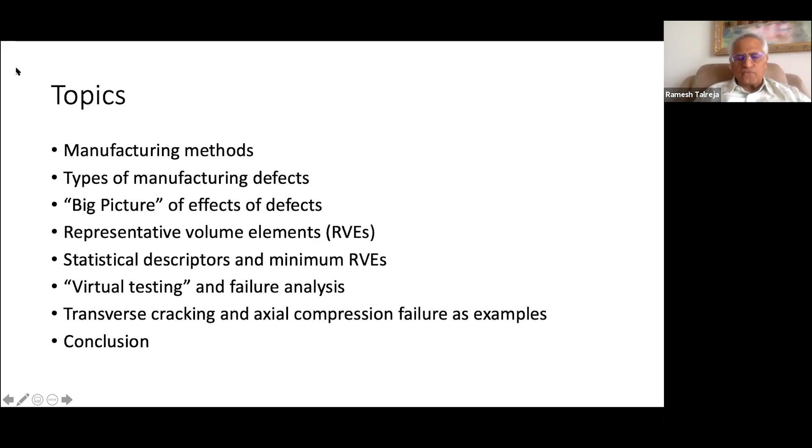I'll illustrate all of this with two simple examples familiar to most people: one is transverse cracking, and the other is failure under axial compression of unidirectional composites. Then I'll conclude. Manufacturing methods are many in polymer matrix composites.

Earlier, from the manufacture of boats, glass fiber boats and such, one was doing hand layup, and in some cases that is still how it's done. There are variations of that—rather than pour the resin, you spray it, or lay up the pre-preg manually in many cases. Automated methods are actually increasing more and more and becoming less expensive.

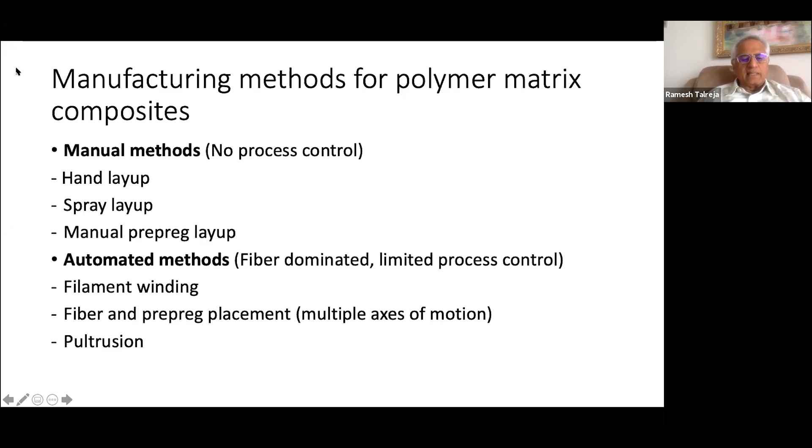In most cases, automated methods are based on the fiber direction—you have to take the fiber orientation as the goal for automated laying up. So filament winding, pre-preg layup, and pultrusion are common examples of that.

Whereas molding methods have developed over the years. RTM is sort of the classical one. Its variations include vacuum-assisted RTM, resin infusion in various ways, and thermoforming. The main point to recognize is that any manufacturing method that is controlled well will give fewer manufacturing defects, and as you control the manufacturing more, typically the cost goes up. It's also to do with whether the particular composite structure allows process control.

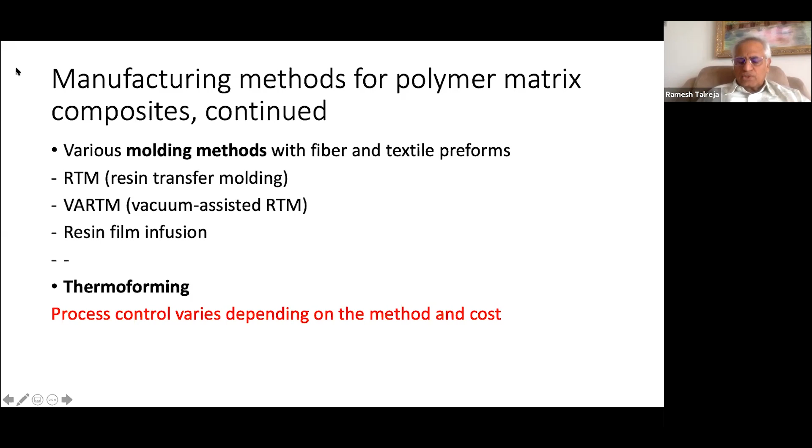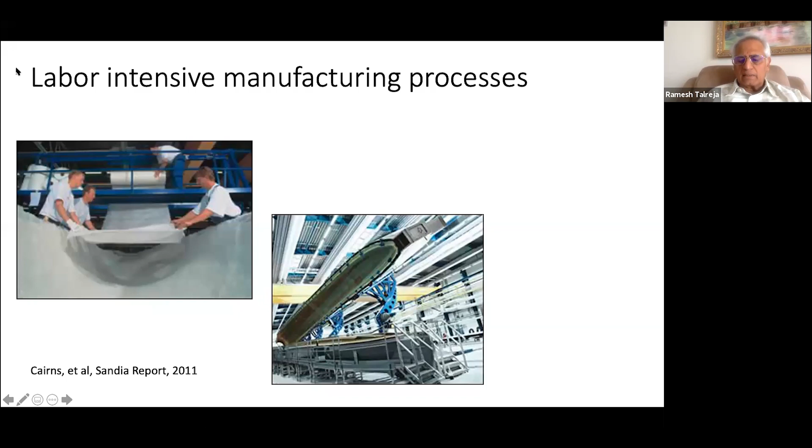So with this, I'll show you some images. This is from the Sandia report of 2011, where they went around and looked at how wind turbine blades were being manufactured, and took pictures to show how things are not as advanced as in the aerospace industry, simply because of cost. The picture on the left is a hand layup of mats in the mold. On the right, you see two parts of the mold being closed. You can imagine that the labor-intensive input here reduces the amount of control you can have in producing a quality product.

Here are some laboratory examples intentionally trying to see how defects will come about. On the top left, you see a case where prepregs were removed too early from the bag in which they were enclosed, so moisture in the air settled on the surface and diffused inside. Then during curing, that moisture expanded into voids you see as dark areas. Here you see a void, typically an air pocket trapped between two layers, and the consequence of that leading to debonding of a fiber from the matrix around it.

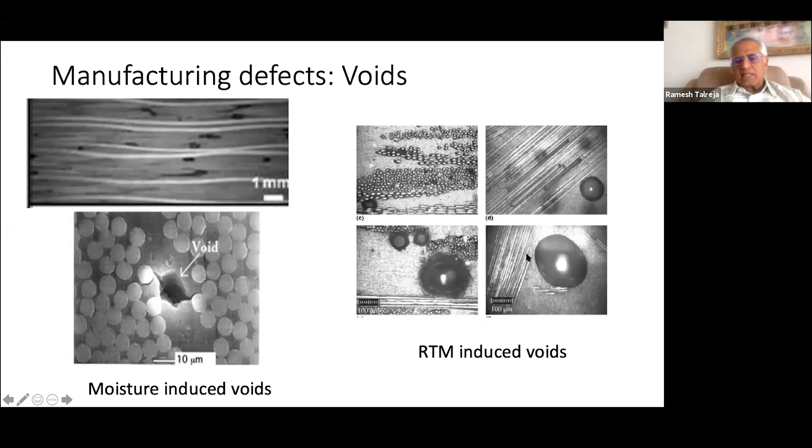Here you see RTM, because it's low cost, typically with much less control. So in some cases you could have a lot of air bubbles left over, and they become essentially undesirable void-like entities that could be causing trouble.

Here's again from the Sandia report, a section of a wind turbine blade where you can see thick layers stacked on top of each other that, on curing, shrunk and caused a disbond between the layers, and therefore delamination under service conditions. Here you see something done in a laboratory environment but following the manufacturing process as it's done in practice, with non-crimp fabric layers stacked on top of each other. After curing, you see waviness and probably some delamination as well.

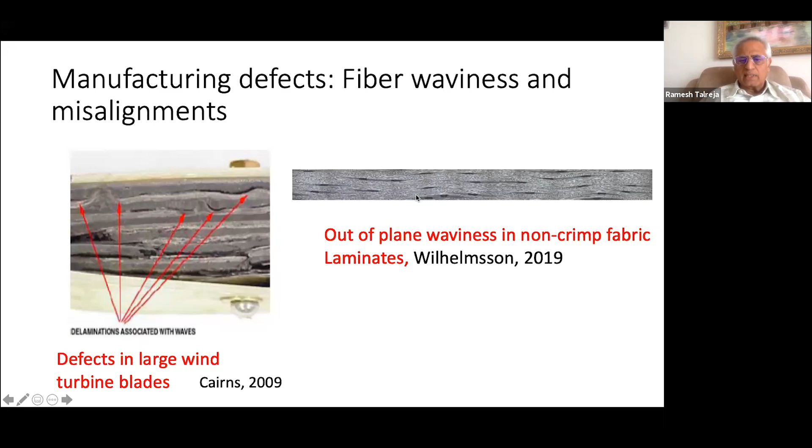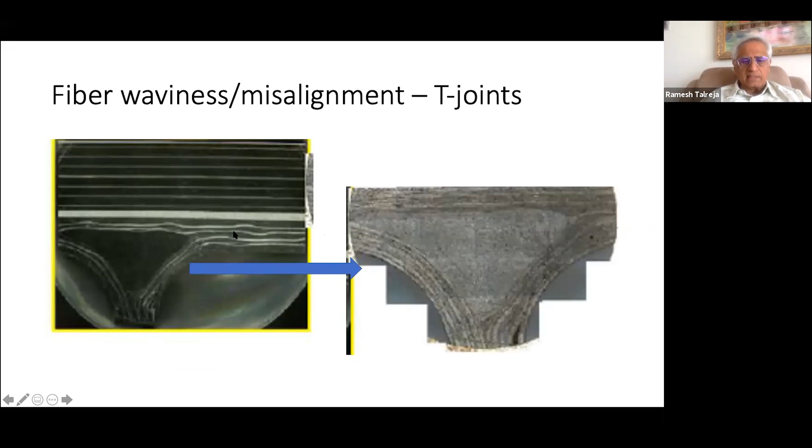I'll come to this particular example a bit later. Adhesive joints are common in composites, and often the thermal expansion mismatch between parts being joined together can lead to waviness of fibers close to the interfaces. You see that situation here, and the close-up picture also shows this.

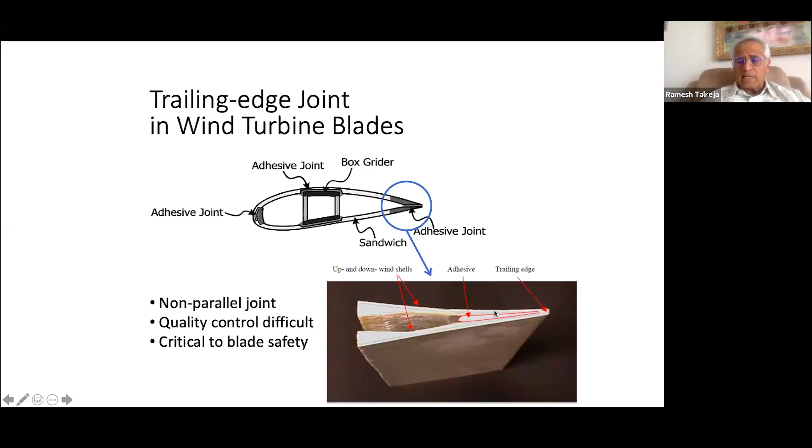There's a lot of adhesive joining going on, and control of this particular joint is very difficult to do, because what's done is to put a paste-like adhesive between the two parts of the shell. And when you close the shell, the two parts, the adhesive squeezes and takes an irregular shape.

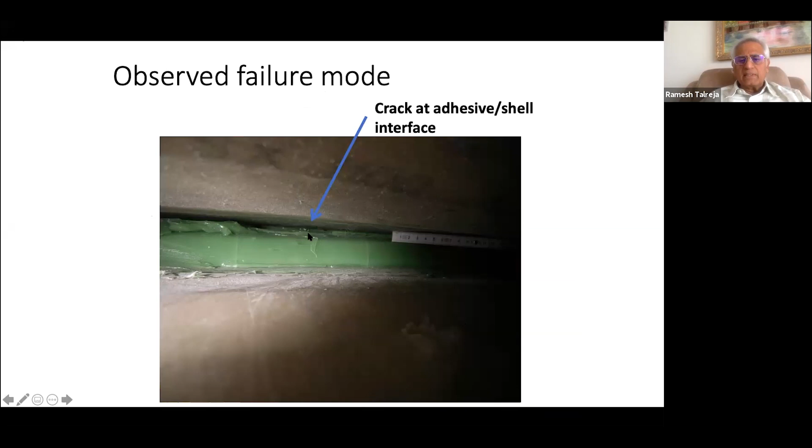You see the result of that is that between the outer shell and the adhesive that joins the lower shell is quite irregular. There are clumps, missing adhesive, and so on. So defects are part of real life in composite materials for the most part. In very few exceptional cases where cost is not of much concern can you control the process completely and avoid defects.

So in this manufacturing sensitive design that I would describe to you, there are three essential steps. The first is to represent the internal structure of a composite when it has been produced, having manufacturing defects. And because the nature of the defects is not deterministic, you had to do statistical simulation of that.

Now, the novel part of the approach that I have been taking with my students is that we want to quantify those defects. So with the statistical simulation, we have added an aspect that will come up with the defect severity as a measure of the defect. And then our idea is to connect that defect severity in step 3 to performance measures.

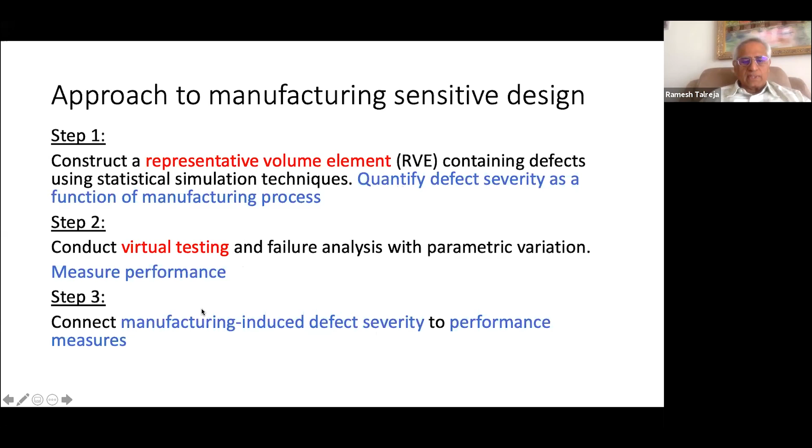And in step 2, you'll do the virtual testing according to what you're looking for, fatigue, static loading, what have you. So this 3-step process is sort of the main thrust of the design strategy.

Here's the workflow of what we would like to see in the future. I mentioned earlier the trade-off between cost and performance, which is right here. So in order to do that, we need to have manufacturing quantified.

My colleagues on the other side in fluid mechanics are working very hard on this aspect. People like me in solid mechanics don't bother too much with that. We wait until they have finished doing their modeling.

And the situation today is that modeling does not provide a full picture of what the microstructure or internal structure of the composite will be, given processing parameters. Anyway, so this is left for the future.

What I'm doing, and similar work in the literature in failure analysis, is to take that manufactured composite, characterize its internal material state, and I have called that RIMS, which is real initial material state.

And as loading progresses, the initial goes to current, so the material state evolves. And that evolution depends on the defect structure in the microstructure. So there's a stationary part of the RIMS that does not evolve, obviously, such as fibers and matrix, but defects become cracks and they evolve and they affect the performance.

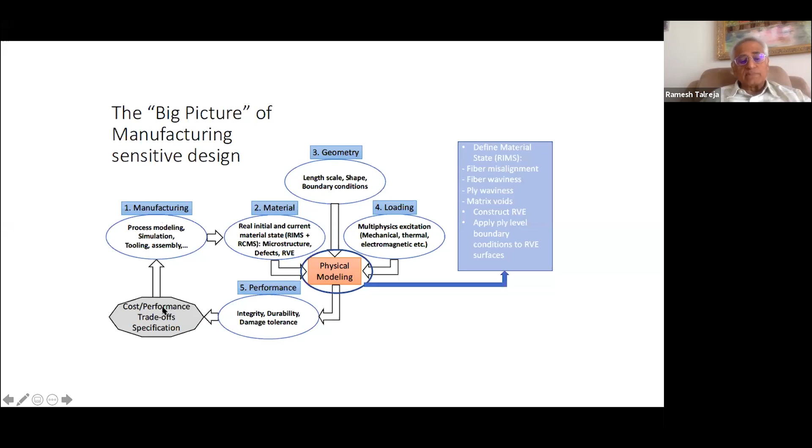So that enters in a physical modeling exercise where other information of geometry, boundary conditions, loading comes as well. All that leaves out as an output performance measures. And that could be for structural integrity, durability, damage tolerance, and taking those quantified measures and then the manufacturing process parameters, one would be able to, sometime in the future hopefully, do this cost-performance trade-off.

So that's the idea. So I'll do two examples, as I said earlier, that are very familiar, to illustrate the basic concepts, the approach, and so on.

One example is that of transverse cracking, which actually should I say, in design, is the target, because that's the first mechanism in most cases that occurs. And you would want to, in many cases, just be sure that it does not happen. So transverse cracking has been a lot of focus of a lot of studies.

These images here show you that when you look at any instant in a cross-section of a UD composite, you see a fiber debonded from matrix, you see a crack in the matrix, and it may be that the debonding occurred first and proceeded as a matrix crack and joined the next debond, or that in a resin-rich pocket, a crack formed in the matrix, went to the fiber surface, debonded it, and proceeded that way. So those are the issues one can resolve through failure analysis.

Here's another example which I showed earlier, where defect is playing a major role. So voids is one type of defect, and non-uniform distribution of fibers, that is to say clustered fibers and resin-rich pockets, those are sort of the features of the internal structure that in this case are important.

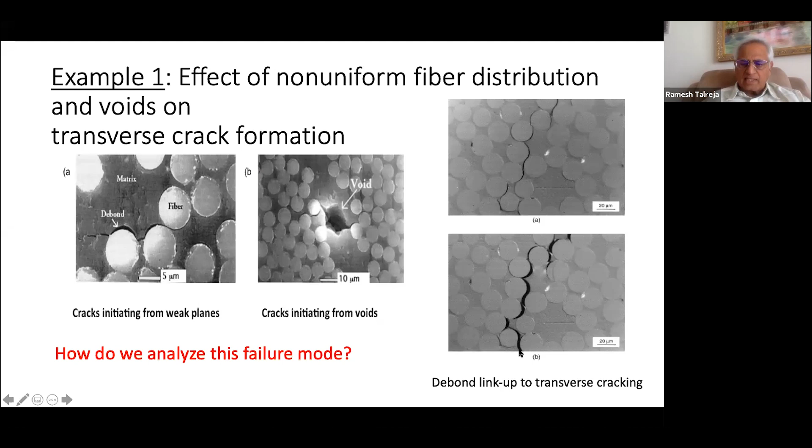Here are certain images that show this early stage develops into a full crack, and the evidence of that comes when you increase the loading, in this case horizontal.

You see the thickening of that dark area, which suggests that on one side, the composite is separating from the other — a crack has formed here. This is a failure mode we like to analyze. So step one of the three-step process is to construct the RVE. As I said earlier, this is not the RVE that is taught in university courses. The original idea of the RVE, which came from work by Hill primarily, was to see how for a heterogeneous body you can do averages of the internal heterogeneous structure.

That is a very benign type of RVE, relatively easy to construct. But if you want to do failure analysis, where the internal structure should be representative of what manufacturing produced, the RVE has to account for certain features of the internal structure important to producing the damage. Those defects I talked about — non-uniform distribution of fibers leading to clusters, resin-rich pockets — had to be in the RVE from the perspective of causing failure. So I'll illustrate how that is done.

The manufacturing defects, as I said before, had to be put into the RVE in a statistical way. So the RVE has to be generated through some statistical procedures, which I will describe soon.

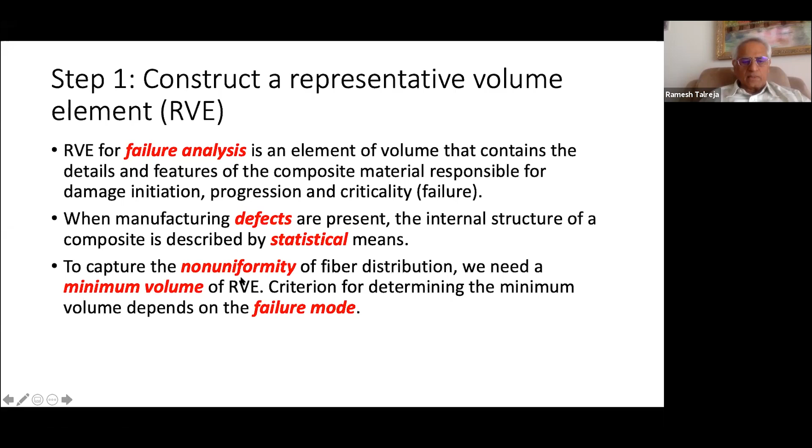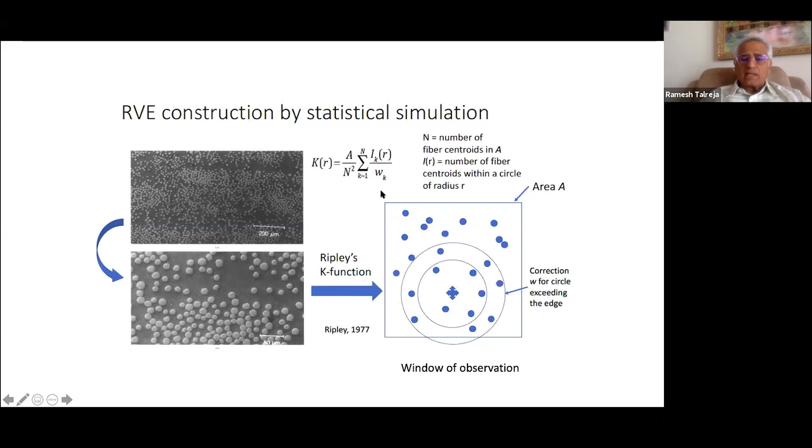It has turned out that some work Ripley did back in 1977 is very useful here. He produced a so-called K function, because he called it K. The formula is here, and I'll talk about that in the next slide. Essentially, what is to be done is to take a representative area A, a field of view, in which you go to the non-uniform distribution of fibers and construct this K function. Let me show what that is.

Here's that picture again. You go to any arbitrary fiber, draw circles of radius r, and plot that radius r value here, and the K function does a statistic of the neighborhood of that particular fiber — where are the other fibers related to this one. What that does is produce a K-R curve that is characteristic of a certain pattern.

It's like a pattern recognition idea. If I give you one non-uniform distribution of fibers and another that is non-uniform, these K curves will show differences between those. If it's a uniform distribution, the K will have a very different appearance.

That's not enough for quantification, so a G function has been proposed. What that does is derive the variation — how the interfiber distance is changing. When you plot that against R, for small values of R, close to the fiber, you have a lot of undulations.

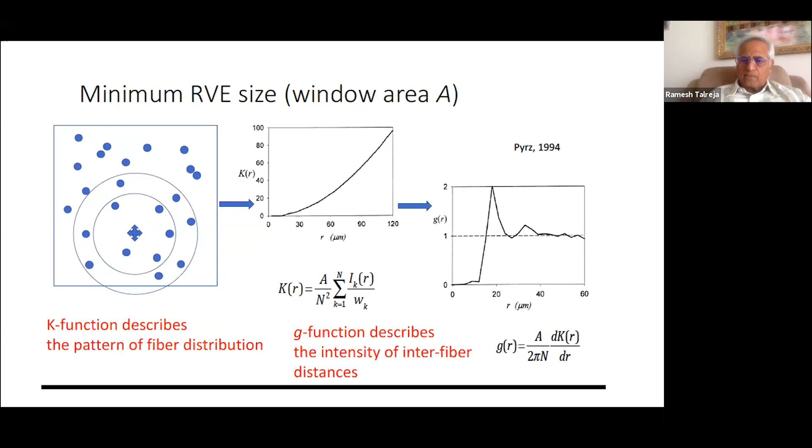As you go further, it stabilizes. What that says is that if you do this statistic up to a certain point, like 40 or 45 microns, you have captured the irregularities. If you go beyond that, you're adding information that isn't really useful, and you want a minimum size so that in computation you don't waste too much time doing analysis.

So how do we go about quantifying this now? That's where our novelty comes in. We have taken two different paths, and I'll describe both to you. I'm calling them RVE construction type 1 and type 2.

In type 1, which is more common in the literature, you start out with a square window in which you place fibers in a uniform pattern with constant separation x between surfaces, as shown there. And then you shake it — it's called the shaking method.

When you say shake it, you have to provide a certain algorithm for shaking, and that algorithm lets you embed your quantification. Now, what's been done in the literature is to just shake it so it becomes non-uniform, but not worry about the degree of non-uniformity. That's where we've made our contribution.

What we do is look at the maximum distance a fiber can travel when you shake it. If you allow it to move that maximum distance and create new positions through random generation of numbers, the final product has maximum non-uniformity. So we call it 100%.

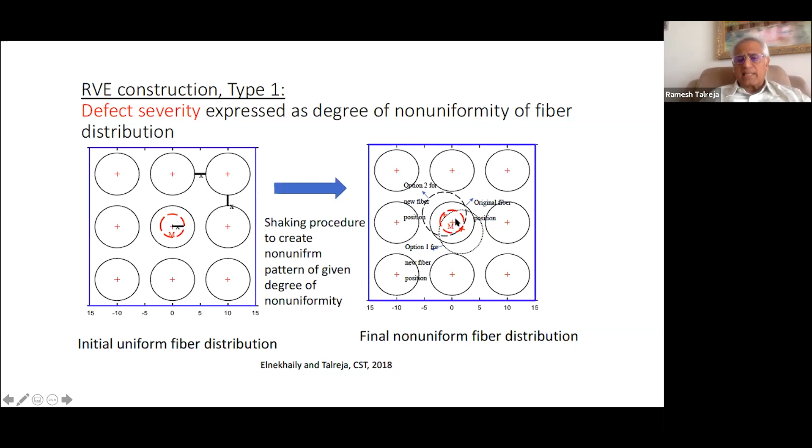Then we reduce the size of the circle in which the centroid of the fiber can take different random positions, and proportionately we say it's not 100%, but 50% or 30%.

Let me show you examples. Of course, it depends on the fiber volume fraction—that's the initial distribution you start out with.

Let's say you start with 40% fiber volume fraction. With 100% non-uniformity, you get a pattern like this. As you reduce the non-uniformity, it becomes more and more uniform. Obviously, at zero non-uniformity, you recover the uniform distribution.

If there's more space between fibers, say 30% fiber volume fraction, you have a much more irregular pattern at 100% non-uniformity, and so on.

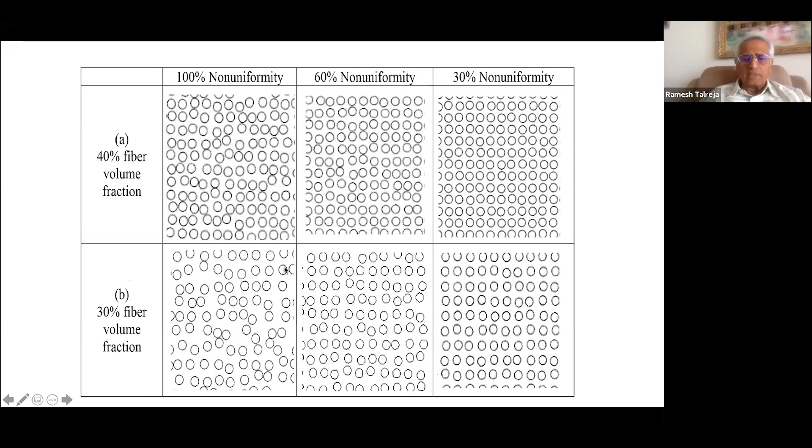The other type is where I want to see what happens to fibers that are initially in, say, a fiber bundle in a fixed position, and as you infuse the resin, how they create a final pattern with non-uniformity. So here we go to the central fiber, make reference there, and then go radially out considering all the rings around it.

You're looking at the first ring here around it, using polar coordinates r and theta, and give the fibers mobility in the radial direction as well as the theta direction. Those two variables together provide the mobility given to this bundle.

If you give increasing mobility, it will spread out more and have fewer clusters. So the algorithm, described in the paper, spreads out the fibers from the outer regions as you proceed.

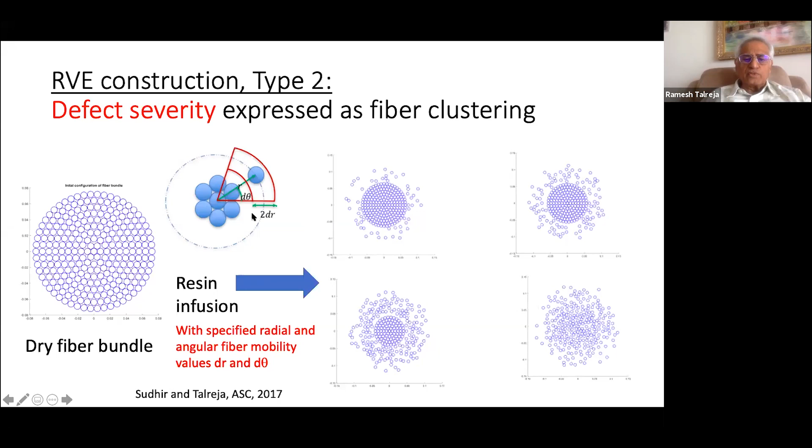You keep doing that until the distance from the central fiber to its neighbor reaches a certain minimum prescribed distance, because you want some resin there to put finite elements in—minimum two. So this is the pattern generated when you specify those mobility quantities, dr and d theta.

Here's an example of low fiber mobility, and you see it's very clustered. With high fiber mobility, it's less clustered and begins to have resin-rich pockets. So that's the idea.

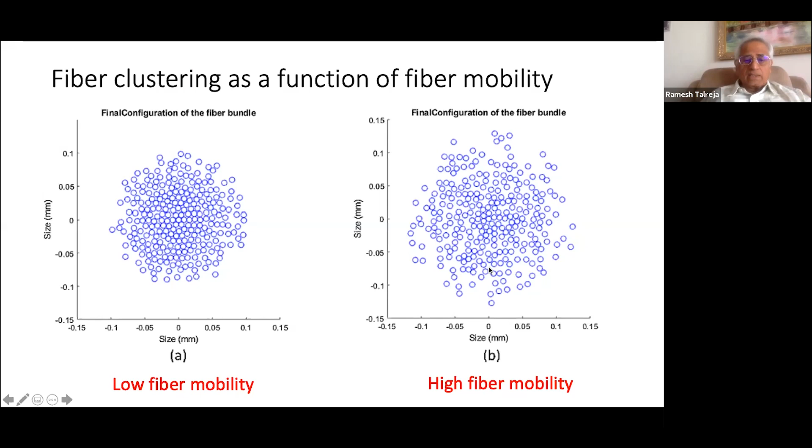Now, getting the minimum RVE is the next step before you do failure analysis. The idea, as I described earlier, is to get a certain statistic to calm down so that if you increase the size of the window, it doesn't add any further useful information.

In this particular shaking method, there's a statistic—I don't have time to describe it, but the concept is clear: that statistic varies until you reach a certain point beyond which it's not changing. So 200 fibers in the window would be the minimum size you need to use, and that's the size of the window.

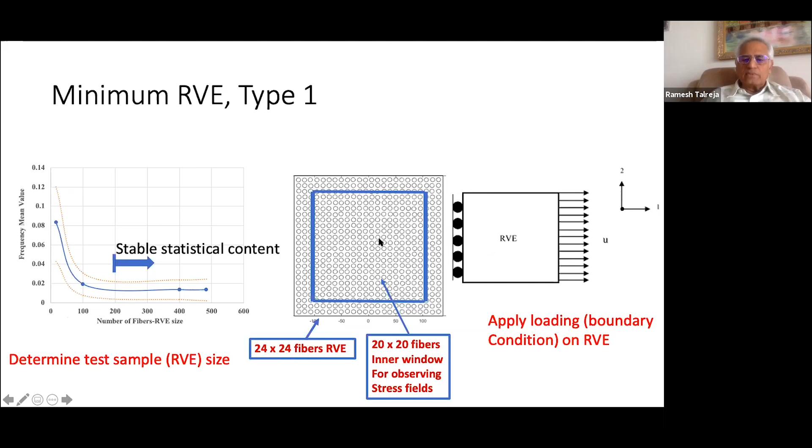You put additional fibers around it to protect that window from edge effects. You apply uniform displacement to this RVE. The edge effects will be in this region, so you go away from it and do your failure analysis here.

The other type is where the final pattern isn't rectangular. So what's done is to encircle it with a circle and then embed that—that's called a cell. Embed the cell in an outer region.

Why? Because this isn't totally suited for applying boundary conditions. So it's done, not so commonly, but the idea is out there: you do an embedded cell, where the outer region is a homogenized composite with straight boundaries—in this case, a square region.

And then we use the Hill idea: if I apply uniform displacement to the boundary and get uniform traction resulting from it, then I'm fine.

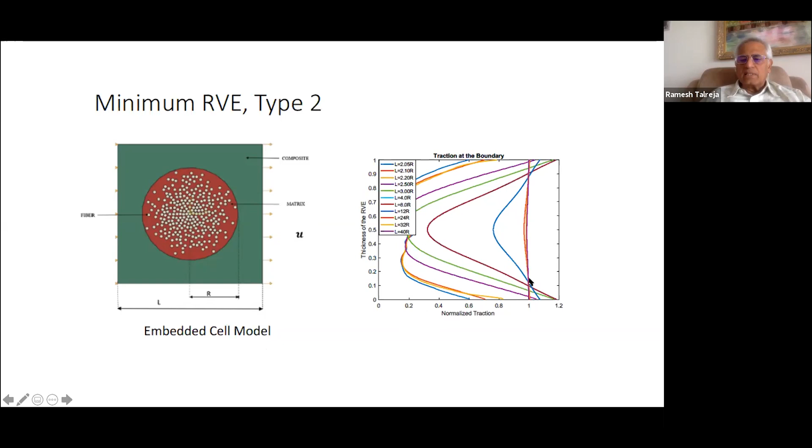If I reduce the size of this outer region, this reduced size gives a non-uniform result. That is, if I apply uniform displacement, I get non-uniform traction. I keep increasing the size until I get equality of uniformity in both cases. Those are details you can find in papers if you wish.

Now for the failure analysis, I need to spend a minute explaining my philosophy. Failure analysis is a legacy of what we've been doing for metals, where uniform conditions often exist. That's not the case here. Using stress analysis causes difficulty in my mind because stress is a tensor and you cannot separate it easily. Let me explain that.

So here's a non-uniform pattern. I'm applying remote stress sigma. If I go to a point like this, the polar point or close to it, where the axis of loading intersects the fiber, I typically have a dilatational or close to dilatational stress state. That means all three principal stresses are tensile and equal or nearly equal - you have only volume expansion here. If you go to a point like this, you get a mixed stress state, which is distortional. It has both shape change and volume change.

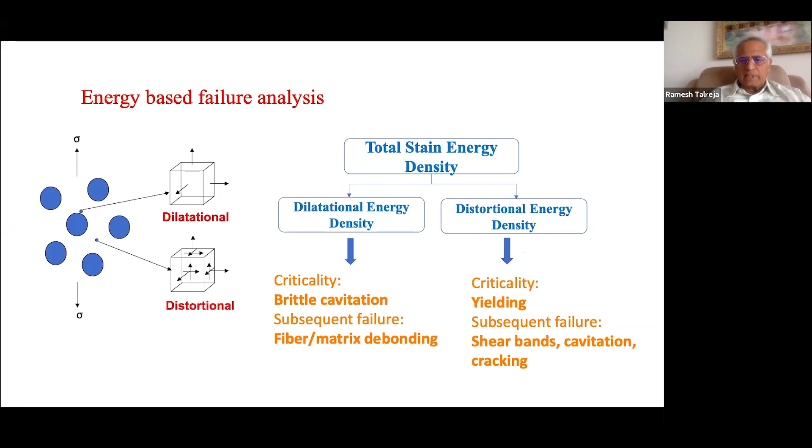With energy, you can separate those two quite easily because energy is a scalar quantity. If I look at the total strain energy, it's split into a dilatational part and a distortional part. The dilatational part becomes critical when the volume expansion reaches a certain value - the material cannot bear further expansion and it bursts as a cavity, or forms a cavity that bursts open. We discovered this mechanism back in 1996; I'll talk about that in the next slide. Most people only look at the distortion energy situation and describe it with the von Mises stress criterion. I'm a firm believer that this strategy leads to problems of a fundamental nature.

Back to this particular point - here's what happens: the cavity forms here. We devised, back in 1996, a method called the poker chip method, taken from some research in rubber by Gent. The important point is that there's a method to independently assess and find the critical value of dilatational energy density that will cause this cavity. This cavity is surrounded by a brittle region because there's no shear, and therefore it expands - bursts open, so to speak.

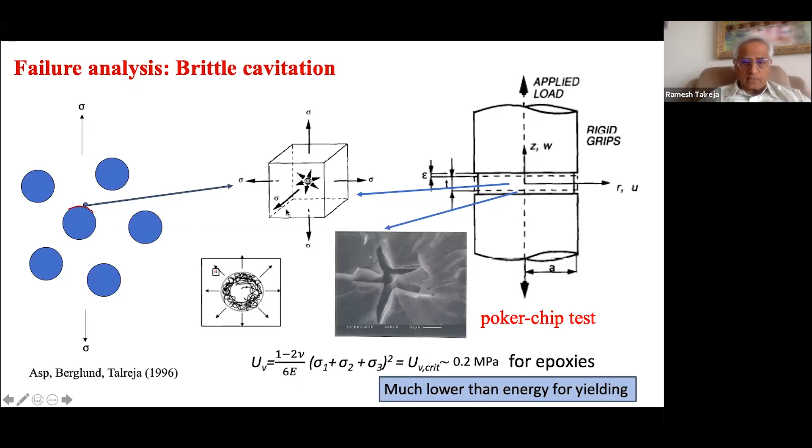The dilatation energy density formula is here, and the value comes out to be very small for epoxy, 0.2 megapascal. This means no other mechanism is able to compete with this particular mechanism. It's an energy dissipating failure mechanism, and no other crack formation mechanism comes close to it. So this is the first mechanism, if its conditions are right - that is, having dilatation energy density.

This will take time to describe, so I'll refer you to the paper. Essentially, what we do is look for the right conditions where the three principal stresses are equal. We plot the ratios, and at an applied strain of approximately 0.3%, the three principal stresses become nearly equal. Then we look at how the maximum dilatation energy and distortion energy values change with applied strain. We find that before reaching this point, you've already satisfied the minimum criterion - the minimum energy density criterion for dilatation. That's what happens in transverse crack formation.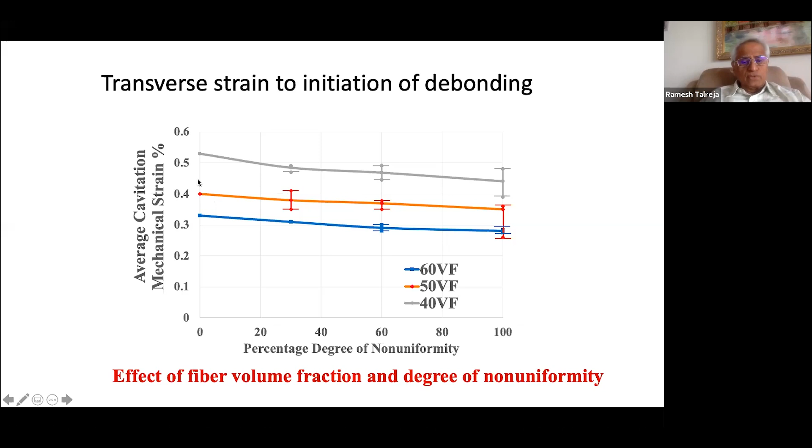So if you're a design engineer and you want to assess that your product has much less control and therefore higher level of non-uniformity, you will go to this value. If you think it is very well controlled with uniform distribution of fibers, then you go to this value.

This is a result which is also of interest. It's approximate because it should have been 3D, but it's 2D. Anyway, I think it qualitatively explains a certain feature that is not intuitively obvious. If I use glass fibers in epoxy versus carbon fibers in epoxy, for the same clusters of fibers, the initiation of dilatation-induced cavitation is earlier in carbon because of the high stiffness mismatch. Now, carbon fiber is believed to be good in every sense, but that is really not the case here. So that's something also to point out.

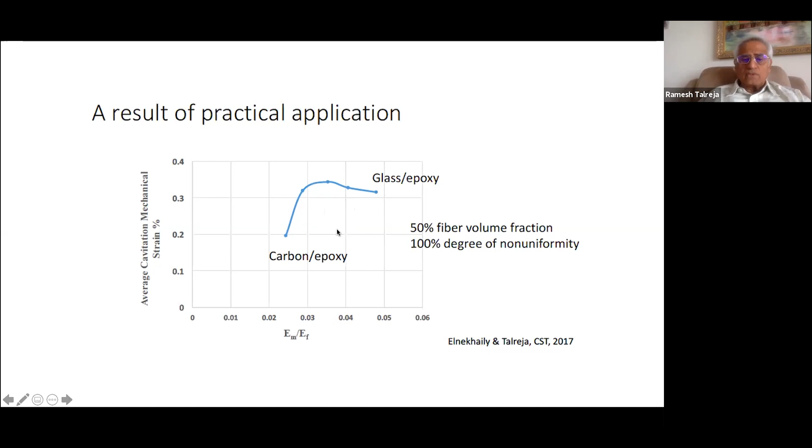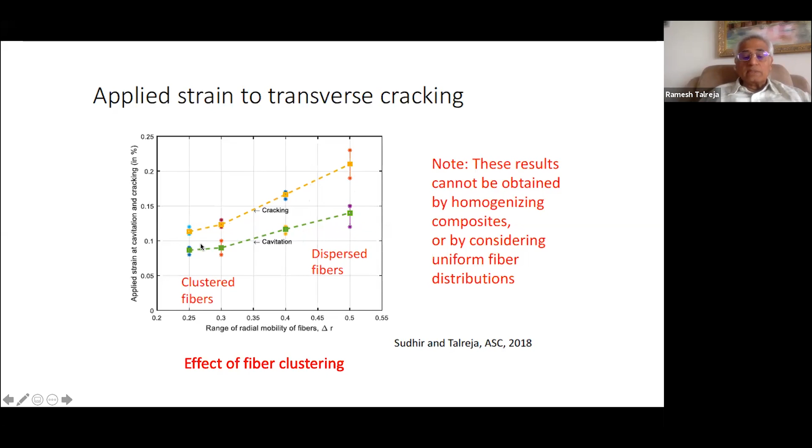We also did analysis of what happens to crack formation from the cavitation point. Of course, it requires higher strain. So this is the initiation, and that's the progression to crack formation. You can see that with dispersed fibers, a higher value is needed to cause cracking, while clustered fibers would do that earlier. So hopefully these are good design guidelines for people concerned with manufacturing.

Okay, I'm going to shift gear and go to another example, which is very different, but illustrates the concepts of this particular strategy. So we are looking at a unidirectional composite under axial compression. At some point, what happens is that you form a kink band. This is now a classical result. Everybody knows about it. This is what happens.

At some point, the fibers break along a certain direction, or along a plane, and another set of fibers fail in a parallel plane. So between those two is what you say a kink band has formed, because it's a kink here. And between those two planes, the fibers then undergo rotation.

So in the Budiansky model, which is classical for this, the geometry constructed has parameters of initial fiber misalignment phi, the rotation of the fibers within the kink band, phi sub s, and this is the bandwidth, and beta is the tilting angle of the kink band.

Okay, using all that with a refined analysis, Budiansky produced this relationship that says what is the stress that you apply at which you have rotation of the fibers. So it's an academic result, very exciting and all that. But you ask yourself, if you are designing and you don't have a kink band to look at, you don't want to have a kink band, how do you get this sort of information in your design? So you had to do some estimates.

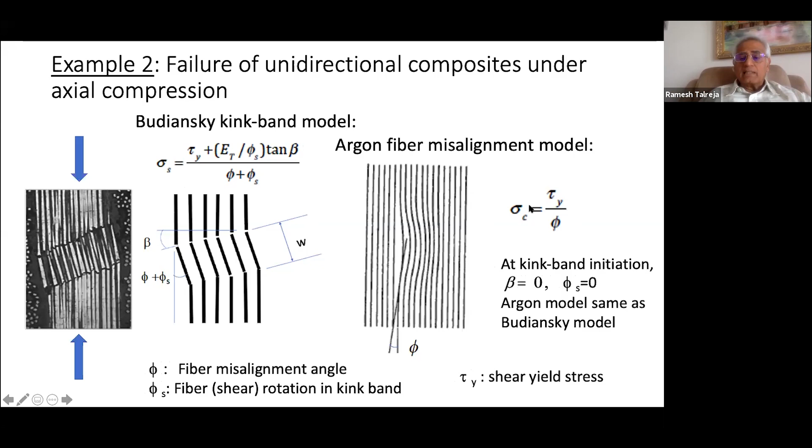And it's a remarkable way of thinking about it, because that's the only information you can reasonably have when you have manufactured a product. So his formula is really, you would say, a specialization of this formula. We will put beta equal to 0 because the kink band has not formed yet. Put phi s equal to 0 because the fibers are not rotated yet. And then you get this result that 10 years earlier, Argon produced in a much simpler way. And I'll show you that this result is very useful in doing this type of analysis of failure that I'm talking about.

So let's go to that. So this is work that has been done recently by... interesting thing is that when you have students and they become professors and they have students, you can visit them anytime you want. So I went to one of my former students who was a professor at Chalmers, and they told me what they were doing. And I'll describe that work to you.

So what they were doing is supported by Volvo. They were producing thicker unidirectional composites using bundles, non-crimp bundles rather, and then looking at, with certain image analysis that they developed, how much was the misalignment.

They were plotting the misalignment angle with its frequency, fitting Gaussian curves to that at a very high level of probability, 95% or so, and picking up that angle. That's the maximum misalignment angle used in Argon's formula, finding excellent correspondence with the data, failure and compression data.

Using Budiansky, with estimating fiber rotation and all that, you were getting conservative results, but this fit very well. For different batches, here is the correspondence, which tells you that the Argon formula worked quite well.

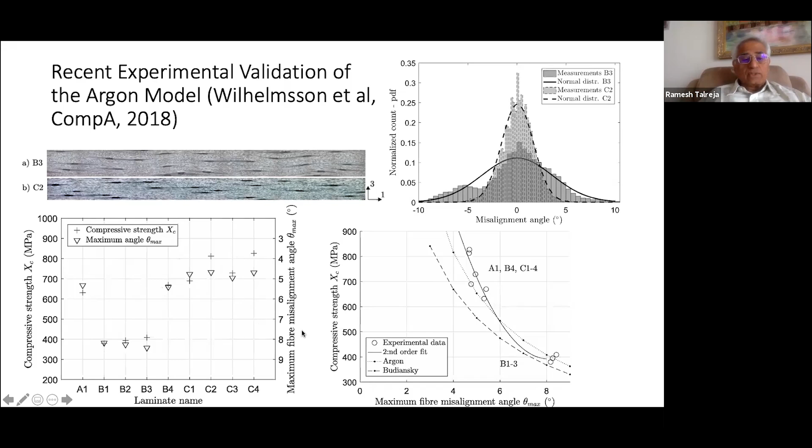So I came into the picture and made the following observation. Argon was trying to develop simple results by using a single fiber misalignment. In reality, you don't have that — you have clusters of fibers misaligned, a misalignment in coordination, so to speak.

So you have images like this, just a sketch, of a bunch of fibers next to each other becoming wavy and therefore misaligned. Inspired by some fracture mechanics analysis, I said let's smear these together as ellipses — the area of influence — and put those ellipses in a solid, considering them as elliptical cracks. Of course they are not cracks, but you use a similar idea as if they were.

So I constructed a measure of defect severity with three parameters in it. Two are the smeared-out ellipse characteristic values — area of the ellipse, minor axis length and orientation of the ellipse — and then the misalignment angle maximum within the ellipse.

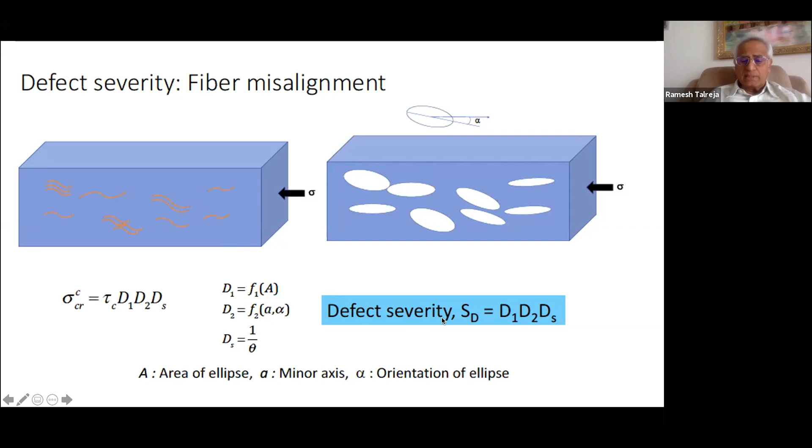This defect severity measure that was constructed actually worked out quite well. Details are in the references; you can read on your own, hopefully. Essentially, this is what was done.

You take two representative images of the manufactured product, produce computer-generated images with fiber misalignment, turn them into elliptical regions, go into the finite element model, and then apply the failure analysis based on Argon and a little bit more.

And then you find which of the elliptical regions will be the first to cause compressive failure. The correspondence was pretty good with the experimental data.

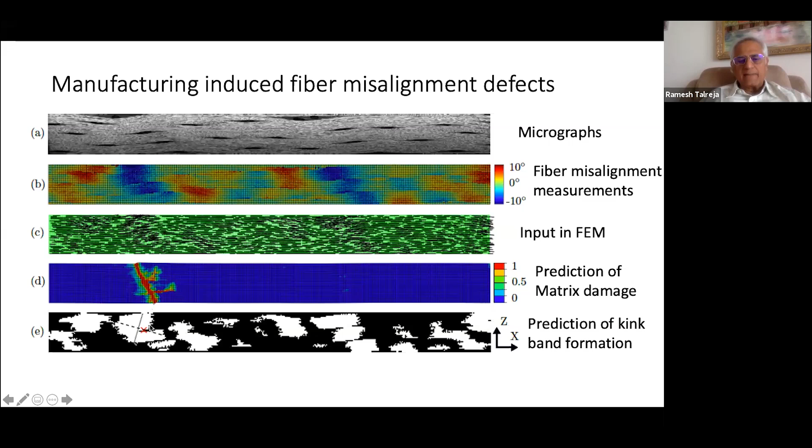With this, I want to save some time for Q&A and summarize what I have presented today. The first point is that manufacturing defects are a reality.

The aerospace industry is still operating on an arbitrary 2% volume fraction of voids — if you are below that, you are okay. I think that's not going to cut it. We have to live with defects. If you try to minimize defects, you increase the cost, and you don't know when you reach the optimal. That is the reality.

Stress and failure analysis must incorporate defects appropriately, not like what we were doing two decades ago — putting artificial defects and doing testing. Testing is physically limited, so we need to do virtual tests.

The novelty of this approach is that I believe in quantification. The defect severity is quantified, damage mechanics is there in a very quantitative manner. Merge those two together to create a strategy for failure analysis — that is manufacturing sensitive design.

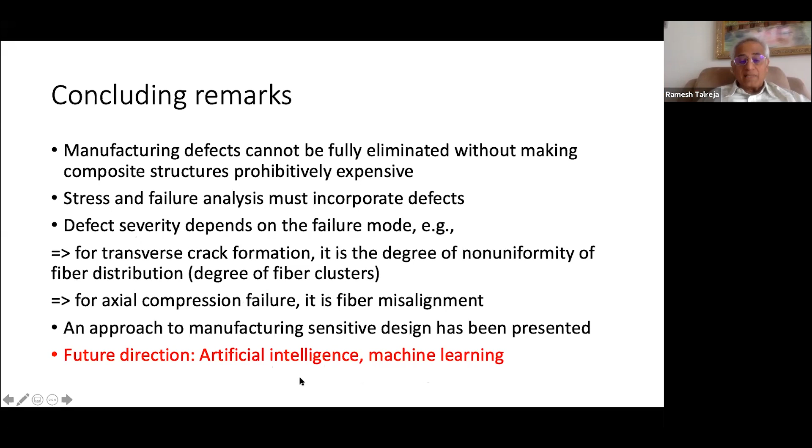In the future, I see putting all these algorithms and physical knowledge into a machine learning process with artificial intelligence. I'm approaching my retirement, so I don't know if I will be able to do that, but hopefully that will be the future direction for the work. I've put references of recent publications connected with this — you may want to look at those if you wish.

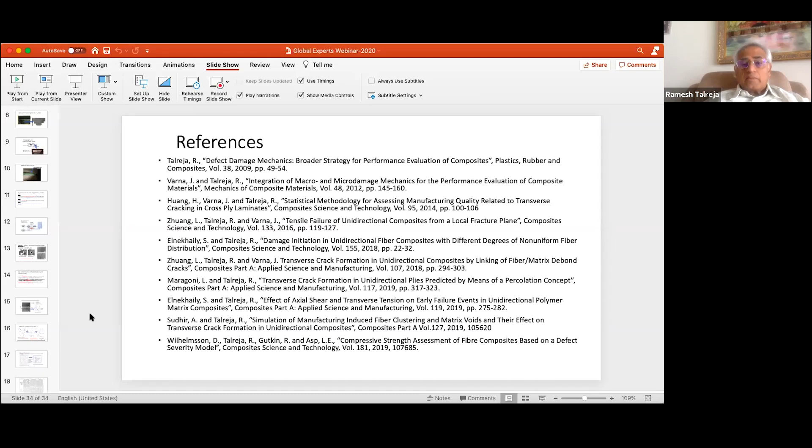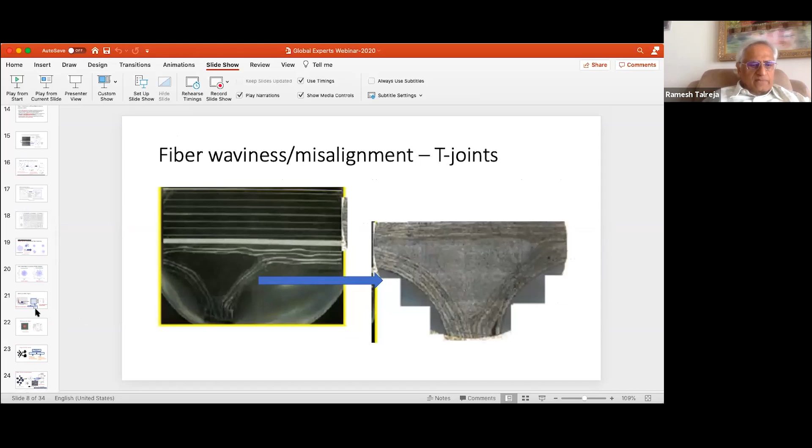So this is the type of guidance you need. You make an assessment: given a certain volume fraction of fibers, I have a well-controlled process, it is as good as uniform fiber distribution, then I take that value, 0.5 some percent. But if it's going to be non-uniform, then I actually lose something — but this loss is from the point of view of initiating debonding, or more correctly, initiating cavitation.

But if you have other damage mechanisms — you're not applying transverse tension, but you're applying transverse compression — the picture will change, and I don't have time to go into all five. There are five basic modes of damage or failure for unidirectional composites. So as a good designer, one has to see which is the main loading mode, and therefore main failure mode, and then take these type of results as guidelines.